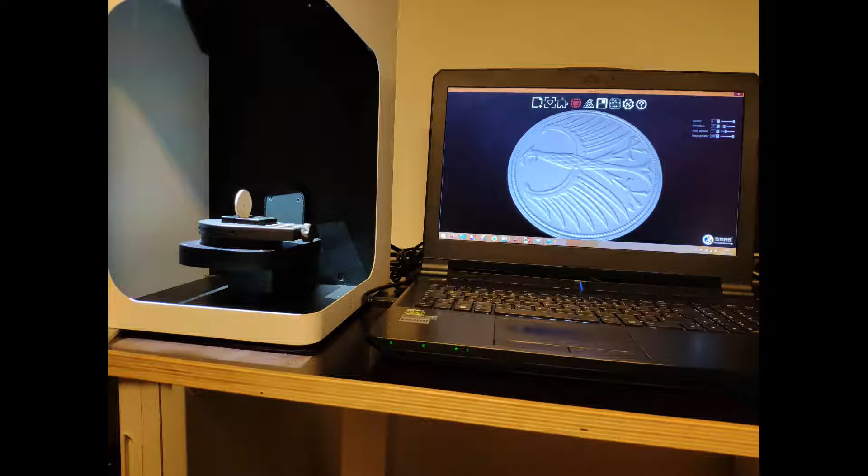This is our recently acquired macro scanner that we added to our portfolio of 3D scanners that we rent. This is a scanner especially for small objects, with dimensions from a bit below 1 centimeter up to, let's say, a maximum of 10 centimeters or even a little less. The advantage of this scanner is that it will capture small surface details much better compared to scanners that were made to scan bigger industrial parts.

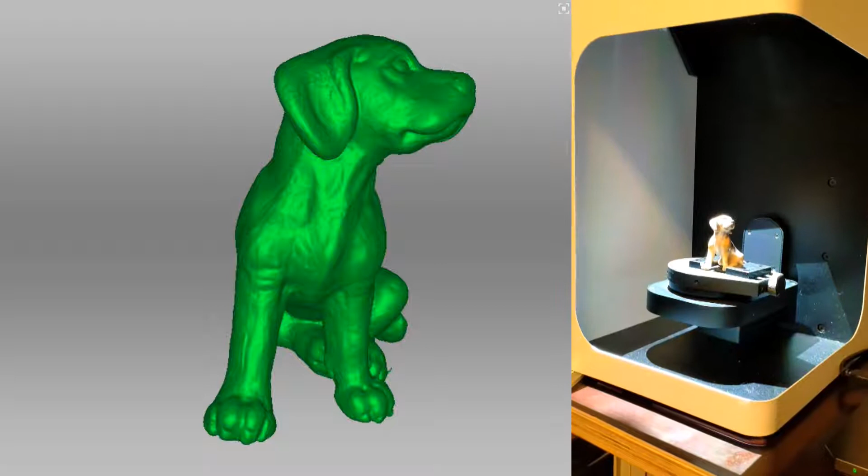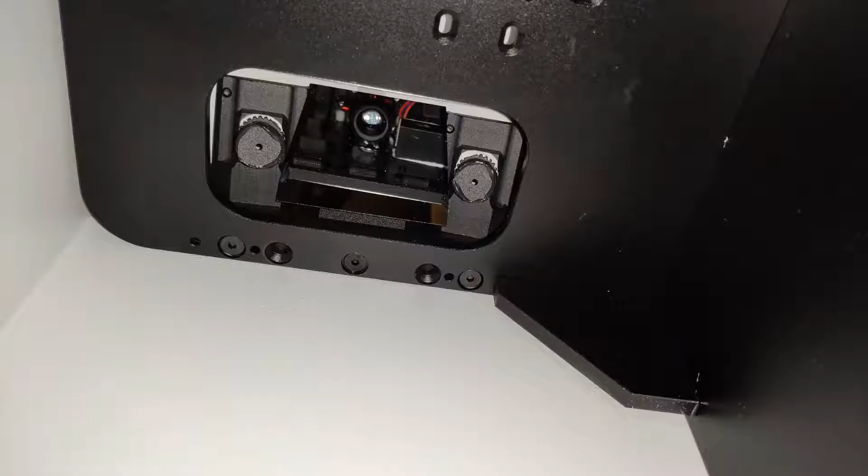So the scanner is especially for jewelry scanning. You can use it for scanning dental objects, but you can also 3D scan miniatures, figures for games and other stuff. By the end of this video you will know how to use it and how to create scans with this scanner. Take a look.

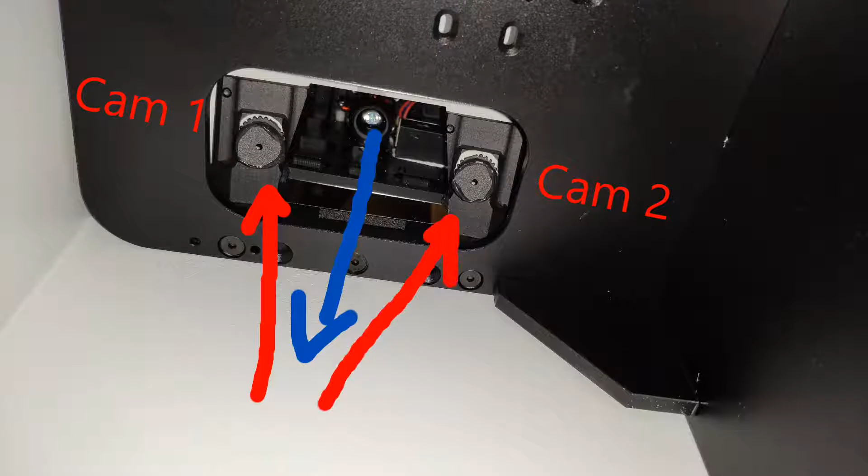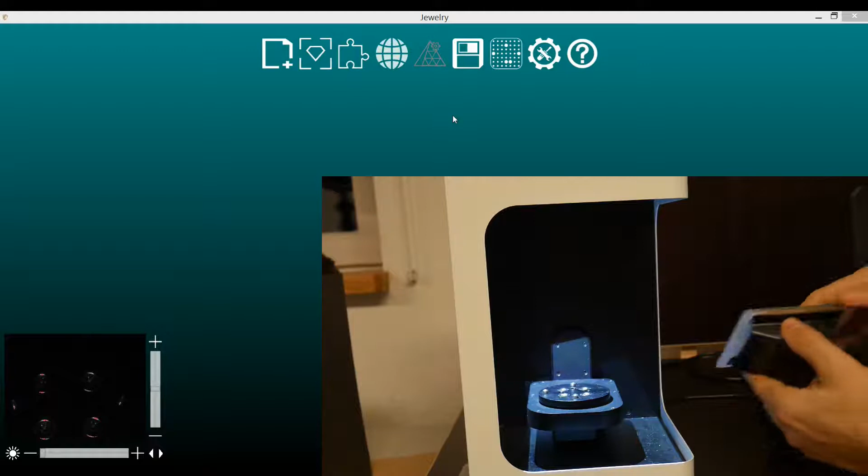So the very first thing you will have to do when you start the scanner is to calibrate it, and therefore there is a calibration board included that has only one possible position to mount it on the turntable, and you don't have to fix it. It's fixed with magnets, so nothing to worry about. For the first calibration, normally you don't have to adjust the brightness. You can, but if you do, you can overbright the image as well. So start somewhere where the brightness seems reasonable to you, and that's fine.

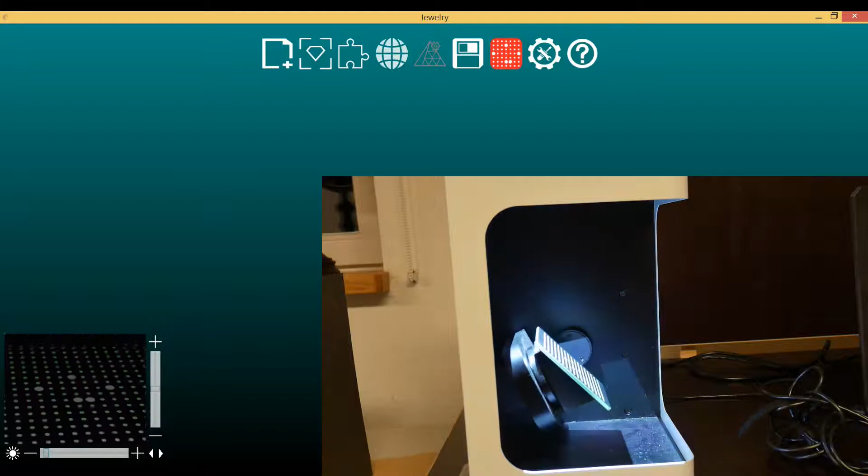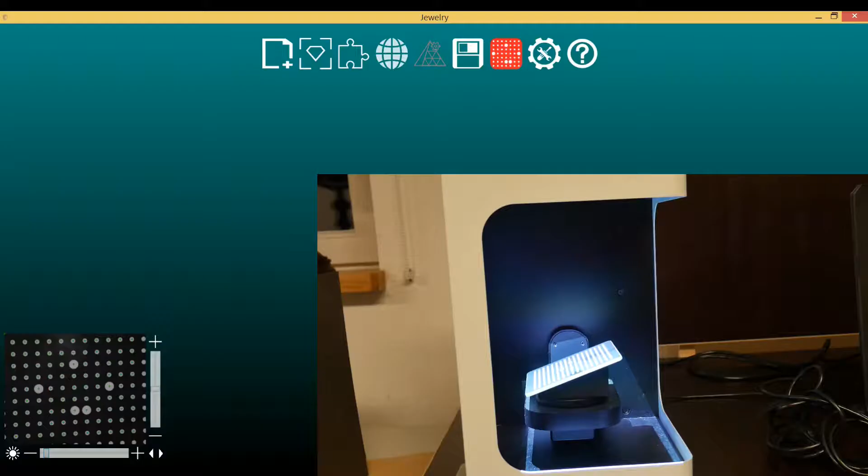And just click the calibration field button here, and everything else will be performed more or less automatically. Here you have to stay with the standard selection. It's 5 millimeter, referring to the calibration board, and this is the only 5 millimeter board available for the scanner. So in several steps the calibration is done automatically. This is not very problematic because you have a 2-axis turntable, so it is not comparable to what you know from other structured light scanners for bigger scale scanning, and that's why it's quite comfortable. So nothing to do for you, just watch and wait.

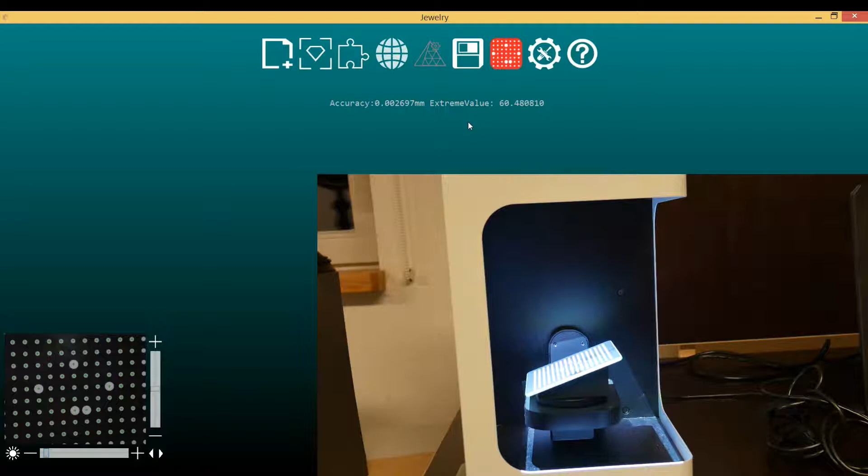Afterwards you get an accuracy value here and an extreme value. It is not exactly explained what it means, but the values are fine, as you have no influence on them, and the calibration is performed automatically. You are absolutely fine right now. Okay, so take off the calibration board and put on the item that you want to scan. That item shouldn't be much bigger than, for example, 5 or 6 centimeters as maximum cubic dimensions.

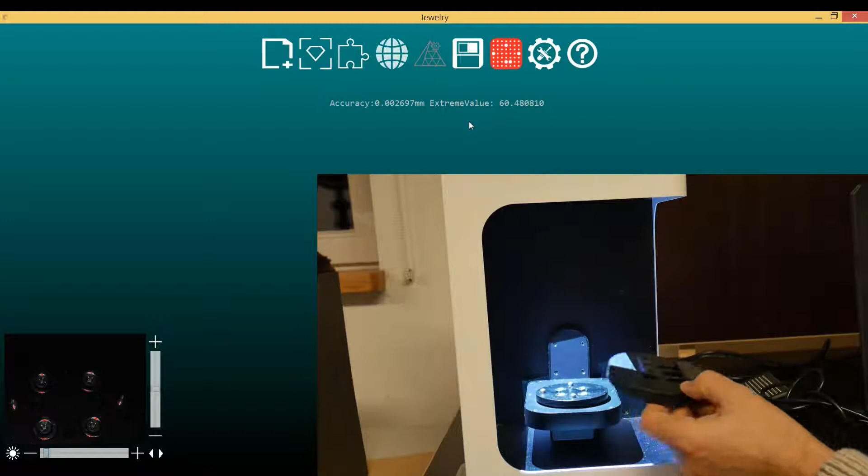So you have 2 possible standard clampings. This is a standard one for clamping over a screw, and there is another one that seems to come more from what you may know from dental scanners. There are different fields for fixing items. You can scan more items here at the same time. I think there will be some 10 centimeters or so maximum scan area for this, but I recommend a maximum object size a bit smaller, like 8 centimeters in maximum dimensions.

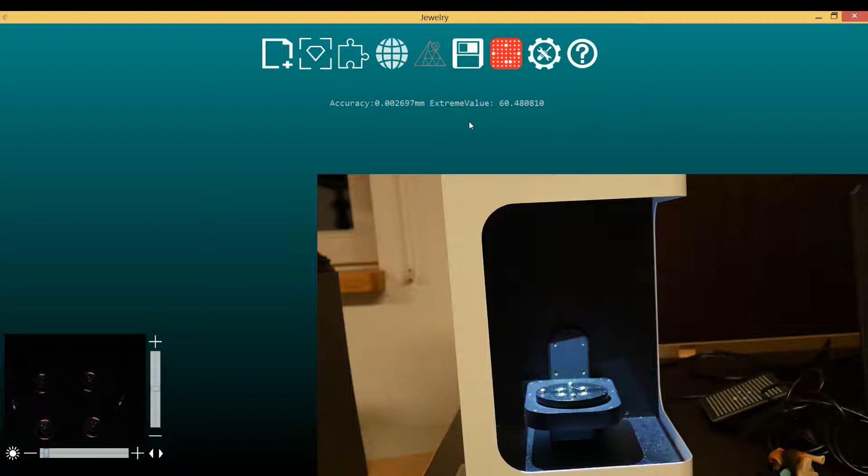All of them have the same plate for the magnet fixing on the back side, so you are not able to do something wrong here, with 3 pins whose positions are well defined. On this kind of table you use some plasticine. You put the plasticine below the object, then stick the object on the plasticine and make sure it's pressed well, so it will withstand the acceleration when scanning on the 2-axis turntable. So for the start and the explanation, I'm doing a quite standard scan. It will be a coin scan.

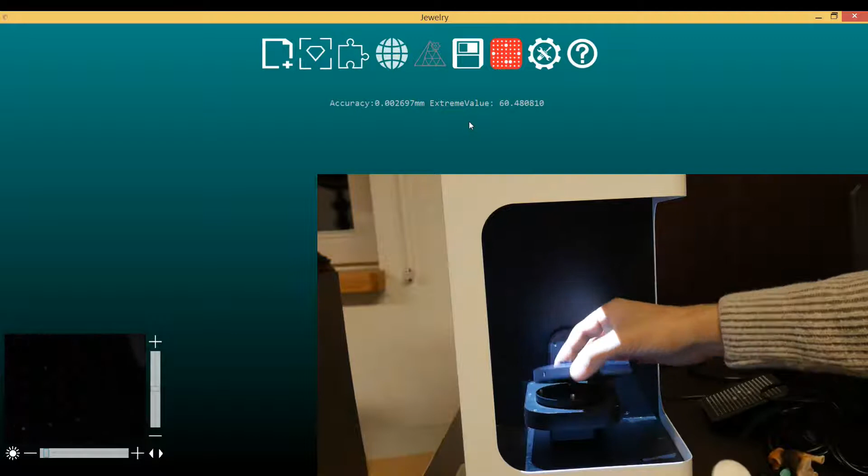For the coin scan, that clamping is quite good. I just clamp it in some depth so that I have a secure fixation, and so that I don't have too much of the object hidden in that clamping.

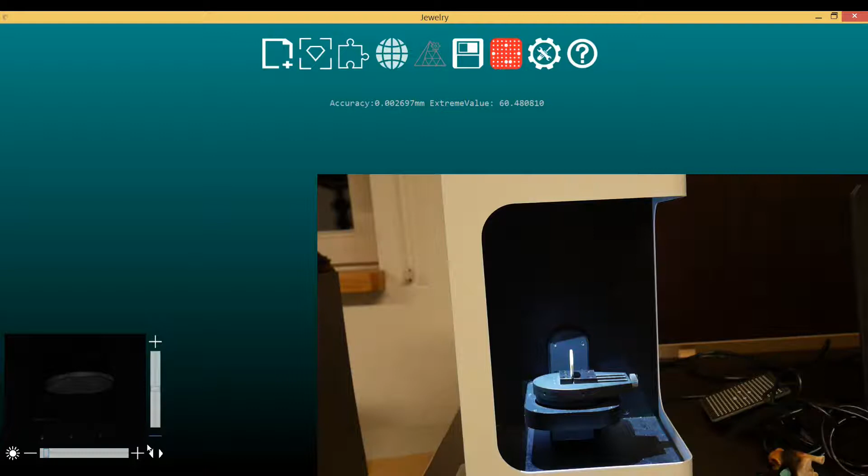I can fine adjust the brightness level. Here it's like in most of the other systems: overbright areas that are, let's say, blurring, are turning red in the preview of the cameras, and you can look at both cameras as well, so they are fine, they are not having any differences.

So I just recommend in that preview to have a not too bright setup. That means you should see at maximum in some very small area something red. Of course, if you are opting for a dark setup, in the case of a black object, you will not see anything. So try to turn up the brightness level till you see the first blurred out red areas, and afterwards go back to the point where all of them disappeared. So you should be fine from the exposure side.

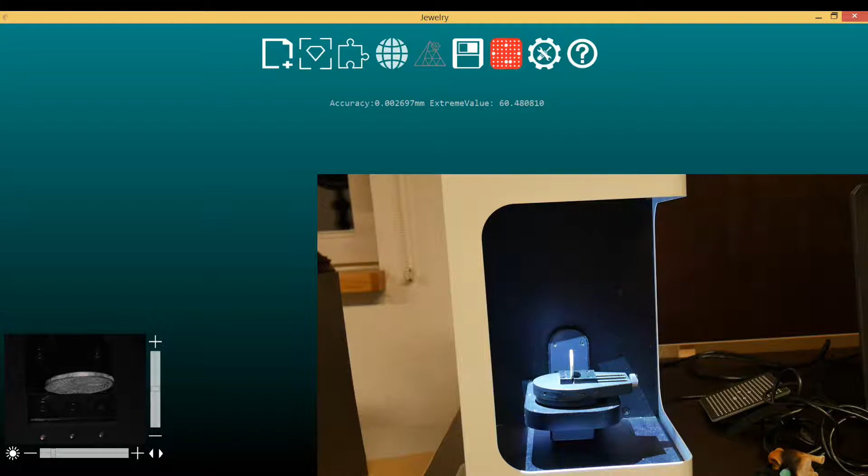And afterwards you can start the scan by first defining the name of the scan. You always have to do it in this direction. The software is not very, let's say, flexible regarding different ways to start scans or vary the procedures. So first define your object name, let's name it coin, and I say HD scan, it means higher resolution. I will start with all the other things in standard. That should be fine for most of the scans actually.

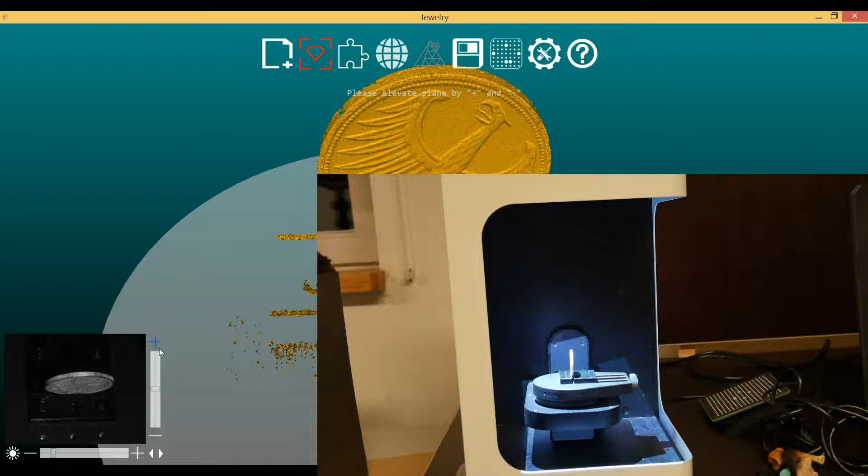And you will receive a pre-scan that shows you the first view. In this pre-scan you can define the area of your scan field that should be regarded. So if you would not change anything and click the OK button, you will scan the clamping as well, which is actually not what you want to see in that case.

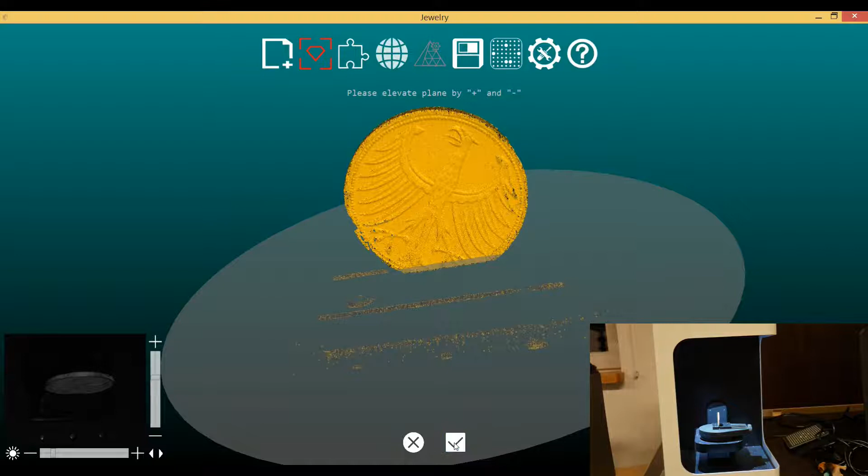So I'm going to go to a point where all the clamping is below that cutting area, but don't cut too much. If you go too far to the upper position, just a very small scanning area will be regarded, a lot of information will be missing, and you may not be able to complete the scan. So just cut away, or keep the clamping below that area, so that you have most of the object above its clamping area. After this is done, you confirm the scan, and the rest will be done totally automatically.

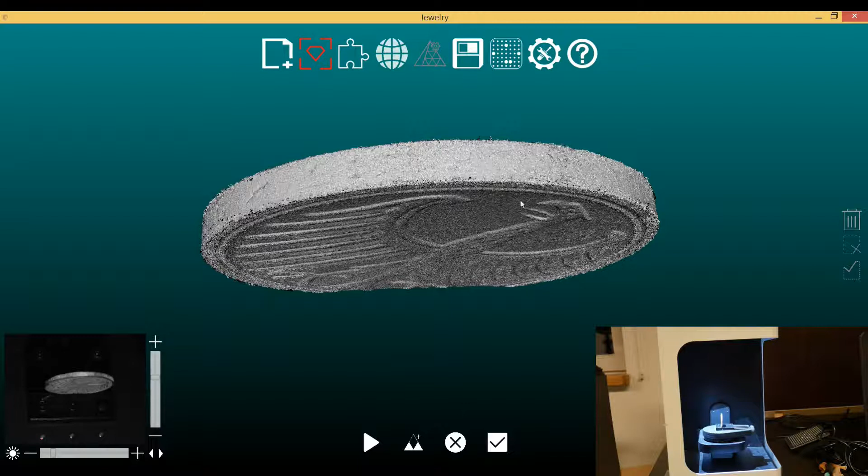So after the first set of scans is done, they are automatically grouped. This means that they are registered against each other, and you see here the first not filtered version of your scan, which is absolutely fine. If you wish, you could cut away some areas by pressing the left mouse button, keeping it down, and sketching some area of your mesh that you don't like, for example. And you can reverse as well, that means go in the opposite direction mathematically: everything that was selected will be unselected and the opposite.

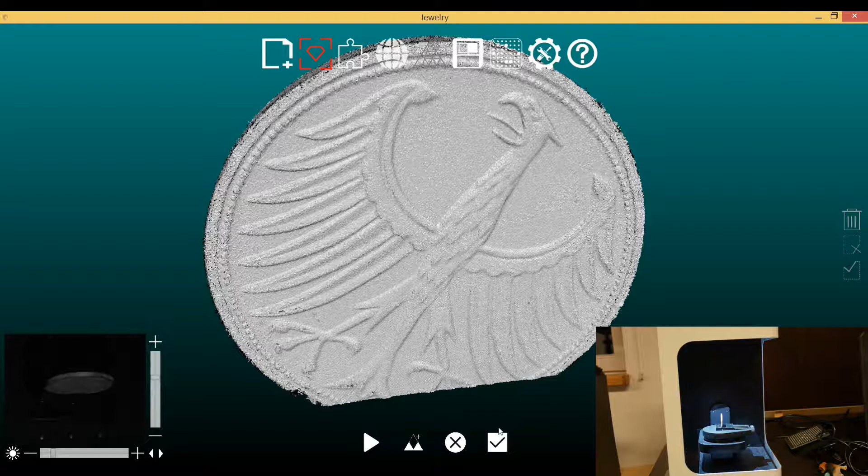Of course, we can go back because I just don't want it. I can delete my selection, and I can delete here that waste without it referring to the whole scan. I can delete that selected area, and in this case it's very small. I just cut away here a piece of an edge. It wasn't necessary, but it's possible, just to show you the possibilities that you have at this point for mesh editing.

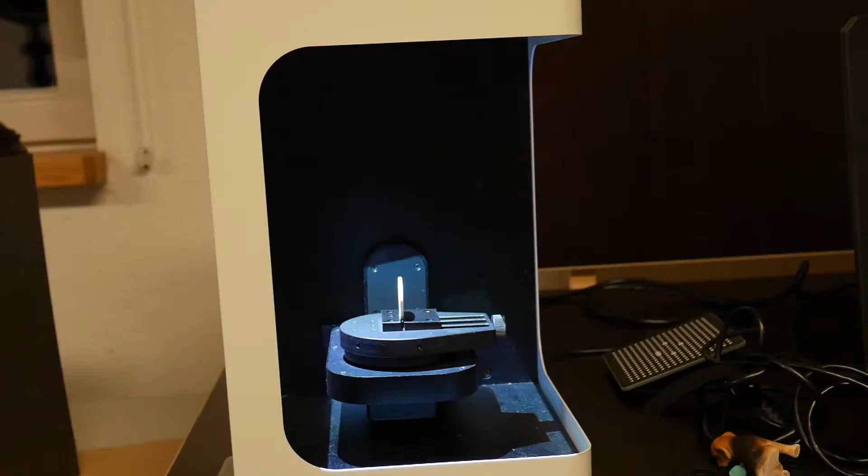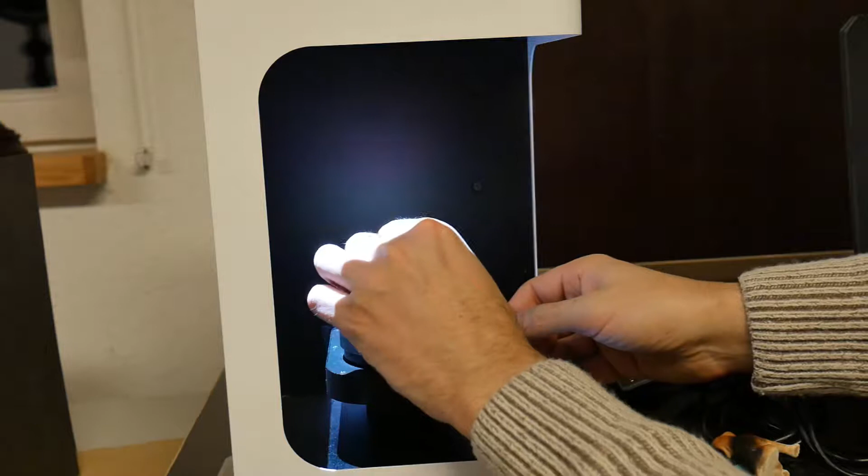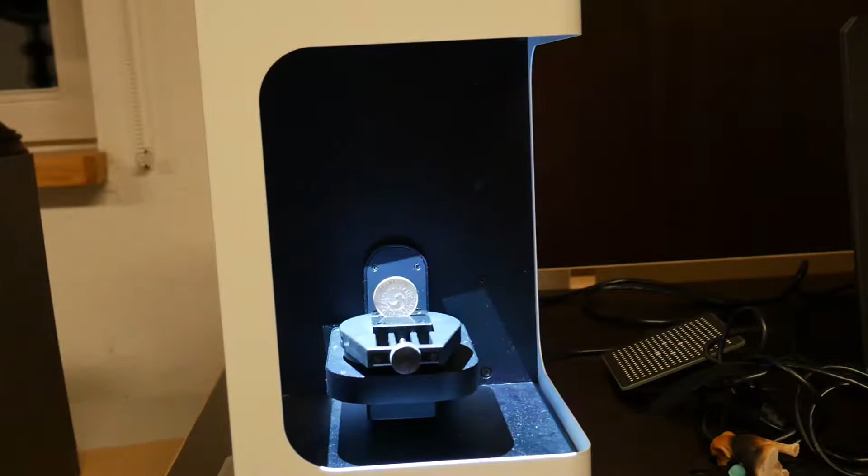I just have to change the clamping position to be able to scan what was hidden in the clamping, and I'm going to turn that coin 90 degrees more or less. If this is done, start the scan again, and another group of scans will be performed automatically. Each group of scans will contain different scan positions and different pictures, and all the pictures will be aligned together to create a more complete surface of your object.

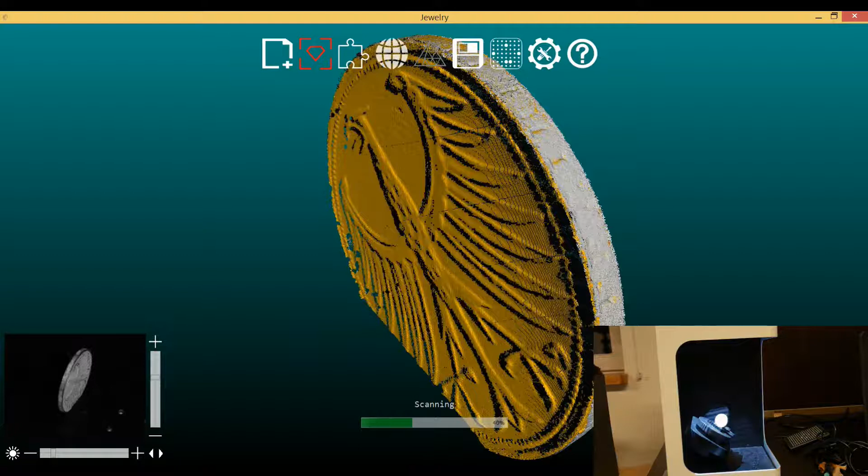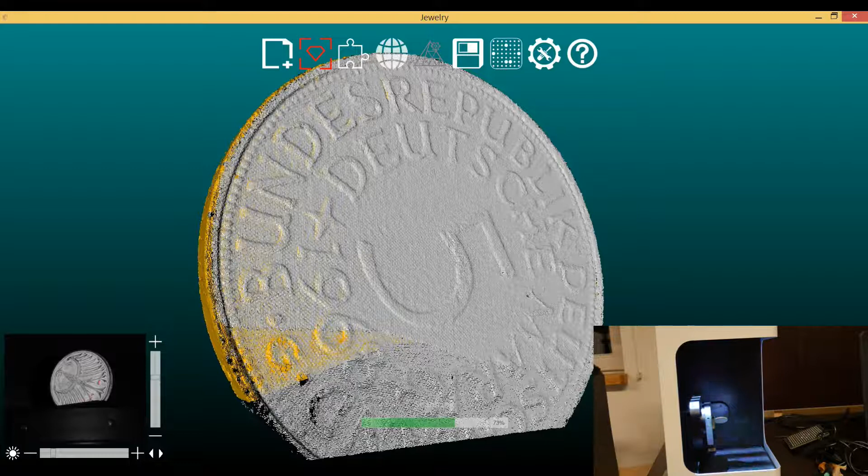Unfortunately, there is no model tree or history tree in this software where you can delete single scans in that automatically performed sequence of scans. So if there is one really bad scan and the rest is fine, you are not able to delete just that one scan. You can only delete one group.

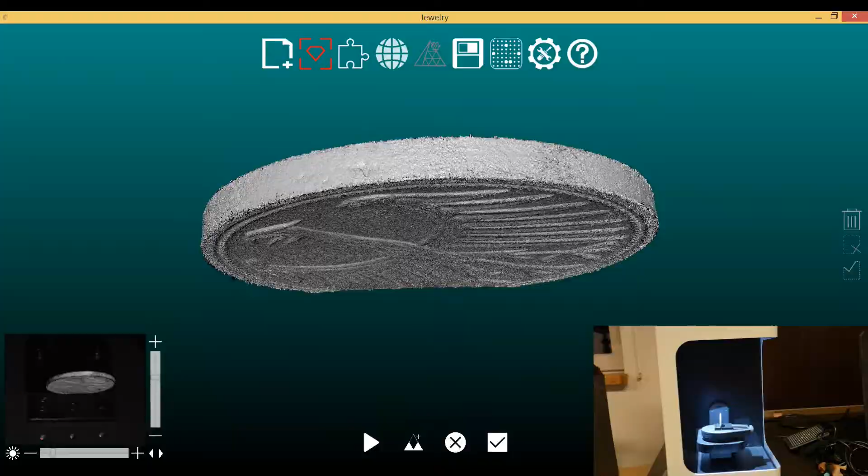That means one new fixture position of your scan, but you cannot delete single scans inside this group. As well, there is unfortunately no visible overview of the number of groups that you already created. So same again, finished one group.

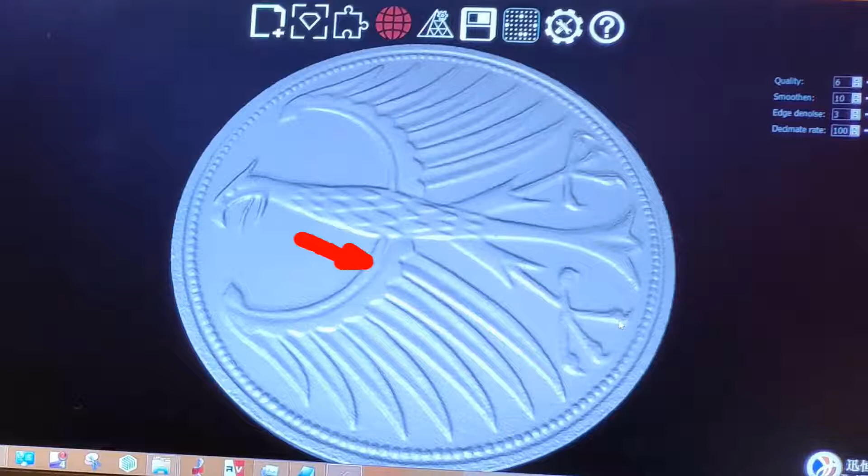Last time the coin will be turned. I just do it a third time, not because the information wouldn't be complete. I just want to have more quality in the different angles for the different small areas.

That means if you have edges in different directions, it is always good if you enter into this edge from one of your clamping positions. Fine, and to be sure, I just made a third clamping position and restart the scan process for the next group of scans.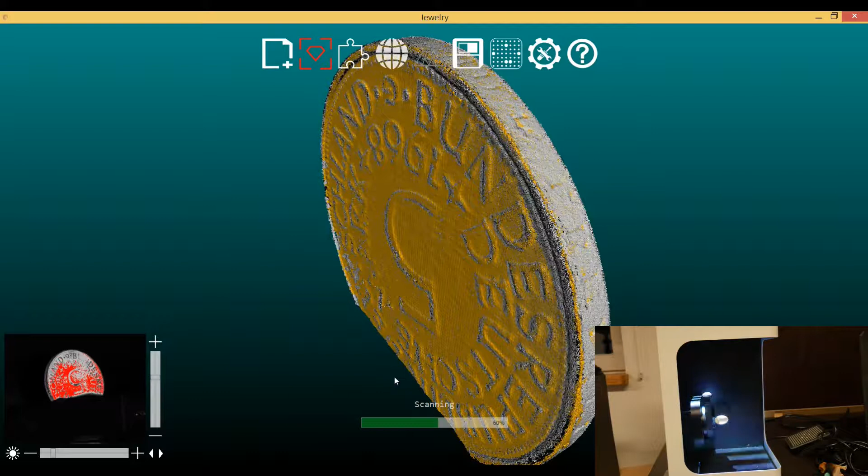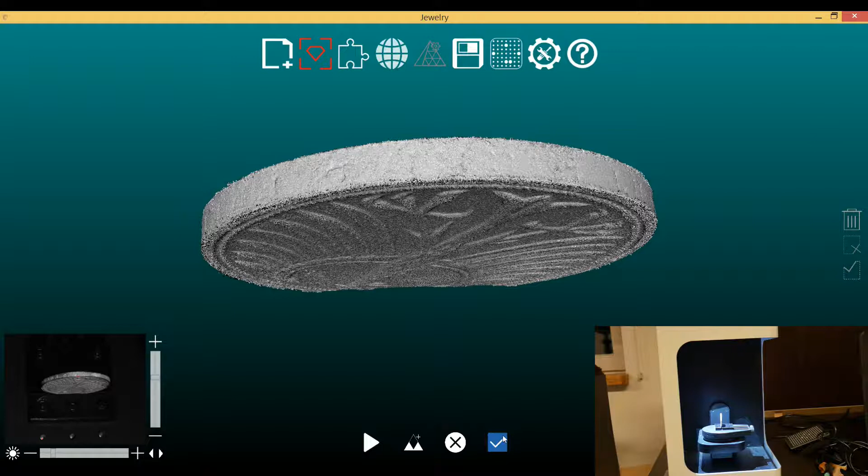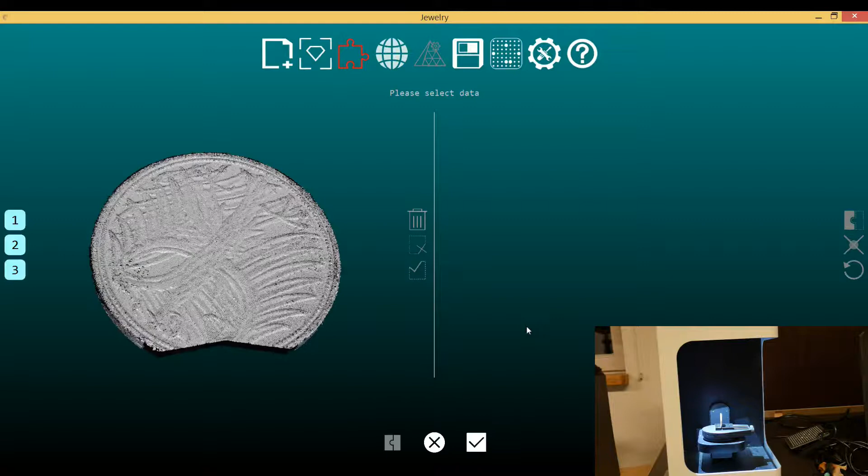So in this case, I'm not going to click on the scan button again because it will create a new group like before. I will finish the scan process by checking the checkbox, and I will be automatically forwarded to the alignment process, in which I can align the different groups that I created to be together one complete model.

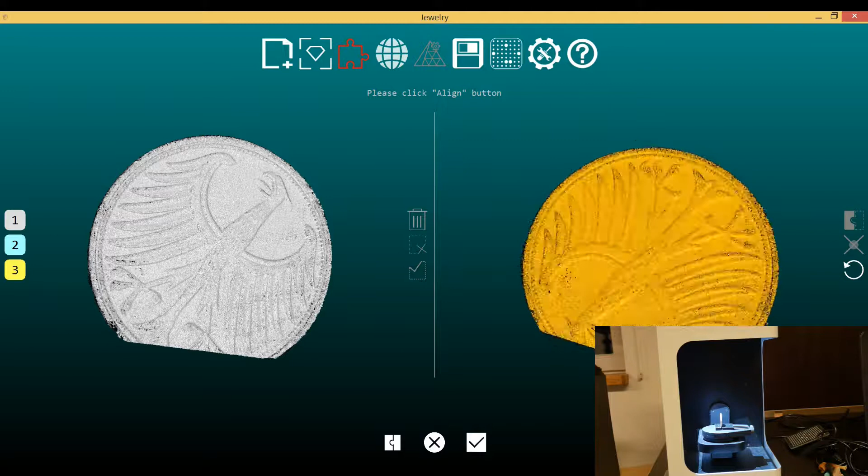And I see here all of them. I just want to select one of them, and I can select a second of them, and the two that I selected will be automatically shown on the two sides of the screen for aligning both groups together to create a closed volume.

Just to help myself, I orientate the coins in a direction where they are in similar positions, so I can orientate myself easily. With this coin it's absolutely not necessary, because you have a lot of clear features, but with other objects it might be very useful to do so. So in this case I'm just going to select 3 points that refer to each other.

Okay, I already started to select one point that is not scanned in the other group, so I don't have a possibility to align these two positions because it's just available in one. So in this case I can go here on the right side, undo point select, and the selected point will disappear. If I have selected more of them and they are wrong, I can go here and refresh and all of them will be gone.

So let's start again. I just search for 3 points that are visible in both views and that I can use for aligning. I always start on the right side. You can start on the left, it doesn't matter, and click the equivalent point on the left side. And I choose points that are easy to identify, on some edge or some area with a feature that is easy to find. And I'm using points that are far away from each other.

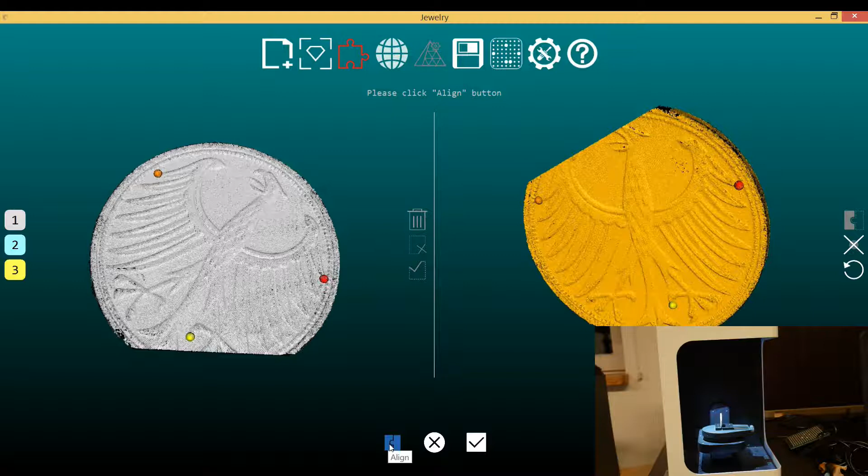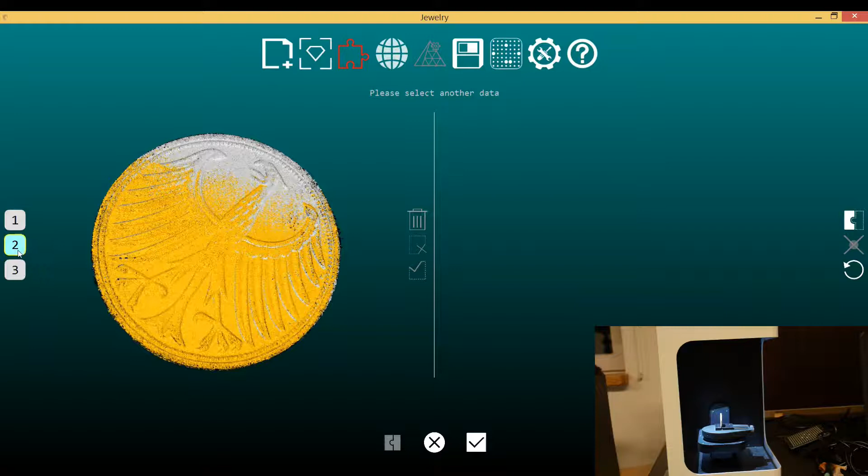After selecting 3 corresponding points, I can go here to the align button to orientate them against each other. At this moment you still have the 2 scans that you are aligning marked by color. Now the scheme is changing, and the only colored group is the one that isn't aligned to the other 2. So the one to be selected is this colorful one, and on the left side you already see the 2 scan groups aligned that you did before.

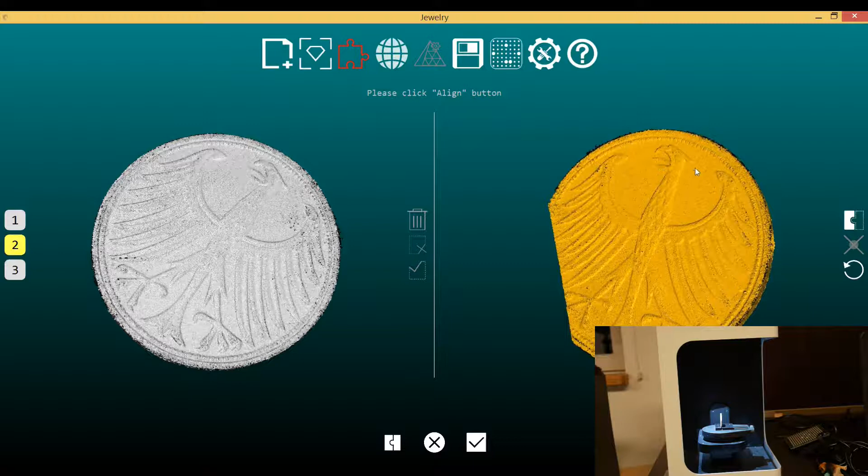And I repeat the same process using 3 points. You just have to select them with the left mouse button, no special shortcuts, and do it on both sides.

In the software it can happen that in the second alignment you select points and they will have different colors. Normally the corresponding points always have the same color. It should be like that. If it's not like that and you surely kept them in the same area and did it like I showed you, one side and then the other side, and don't mix it up, you will be fine. It will be no problem.

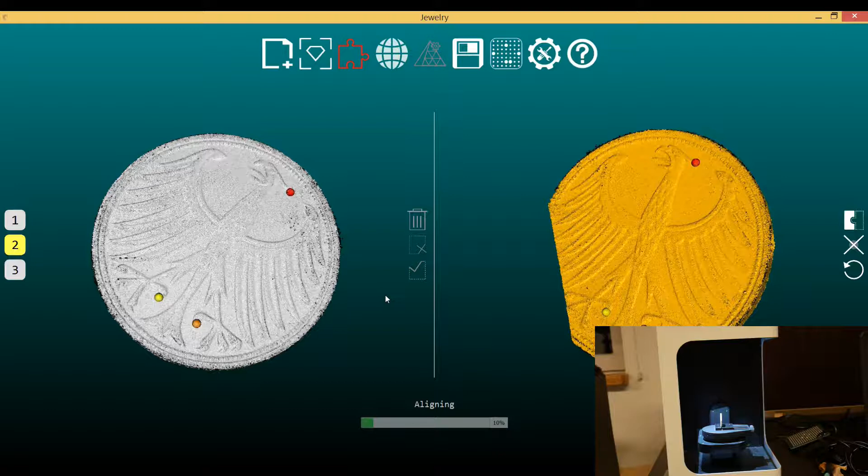It will align as well. So let's align this group, and as we have just 3 groups, we are done. Afterwards, if there would be more groups, there would be more group buttons below them, and it would be marked in color which of them are not aligned to the groups that are aligned to each other already.

So it's easy. After you are finished, you can complete here over that button, and you will be forwarded to the merging. And if you are not satisfied with your alignment, it is possible to go back over unaligned scans, or you can as well refresh your view if you didn't define the points, and you will be going back the step before. But in this case, everything's fine.

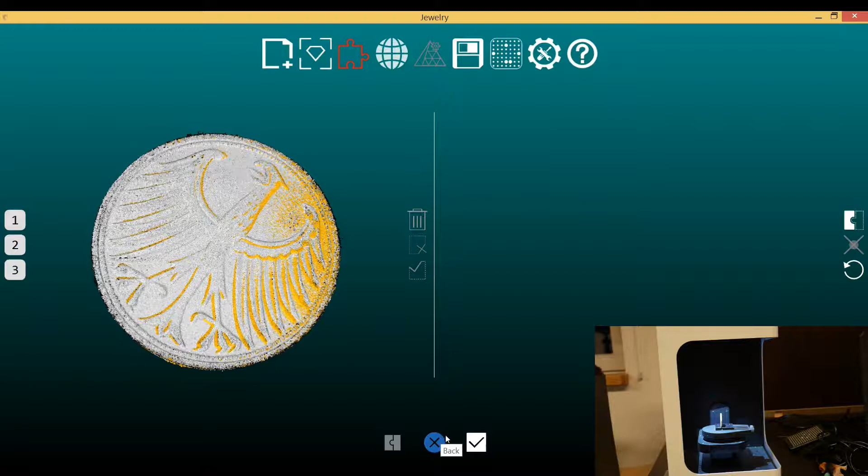I have the buttons that have no functions, they have them gray. I can click on them with the left mouse button, nothing will happen. So everything's easy. I can here as well jump back to the process before if I don't want to continue align, but I'm fine with alignment, and we are done.

And we are right now in our preview before the merging and the global registration process. So I see here that I have a small error in the alignment in the wings, for example, and in this case I can go back. I will have to, of course, do

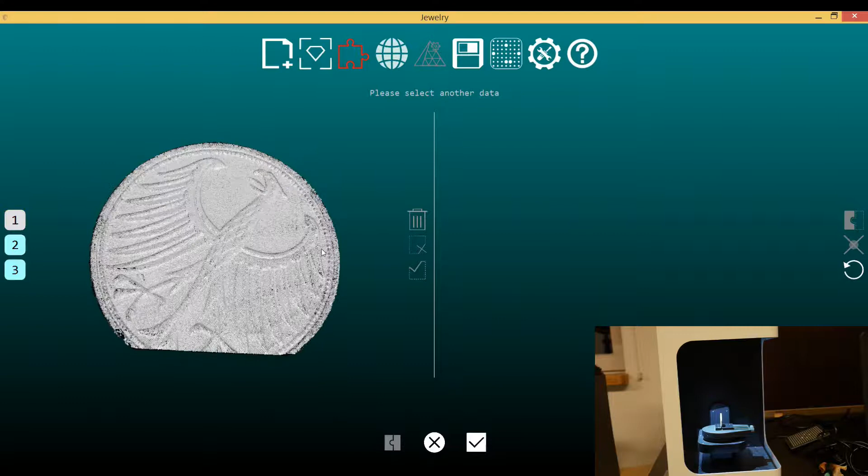that process again, but just to show you that it's possible, because I think the software is very easy to overview, because there are not so many buttons, but the navigation inside the software is, if you have never used it, a bit unintuitive. So we went back, so we are selecting 3 points.

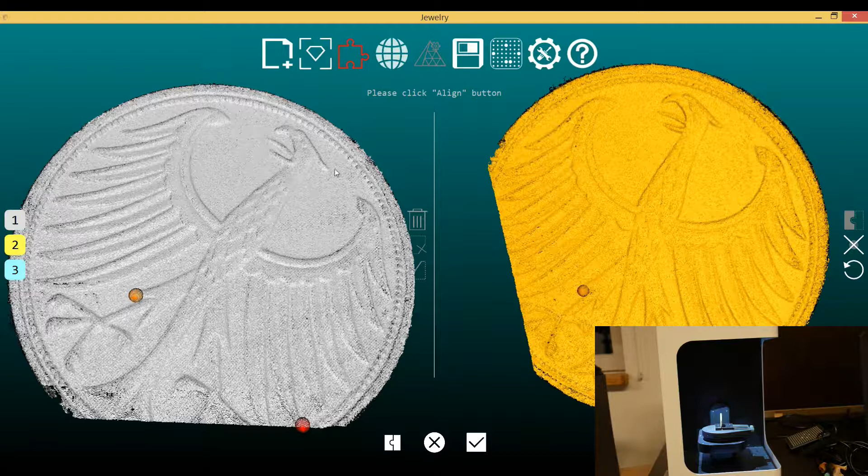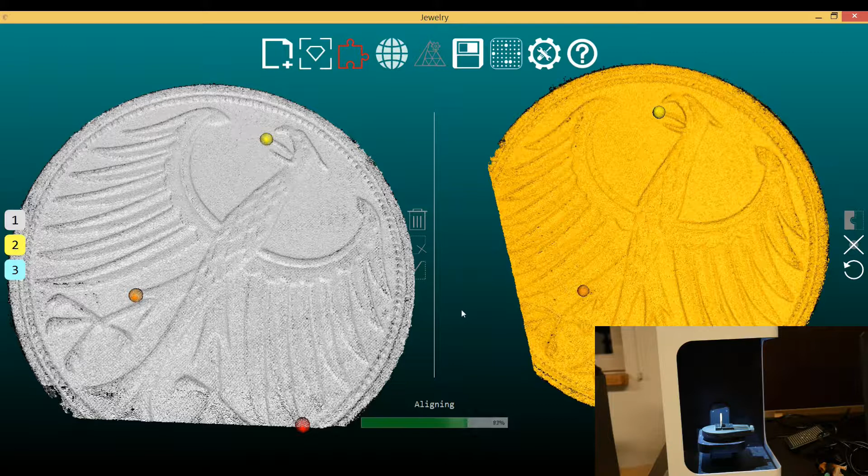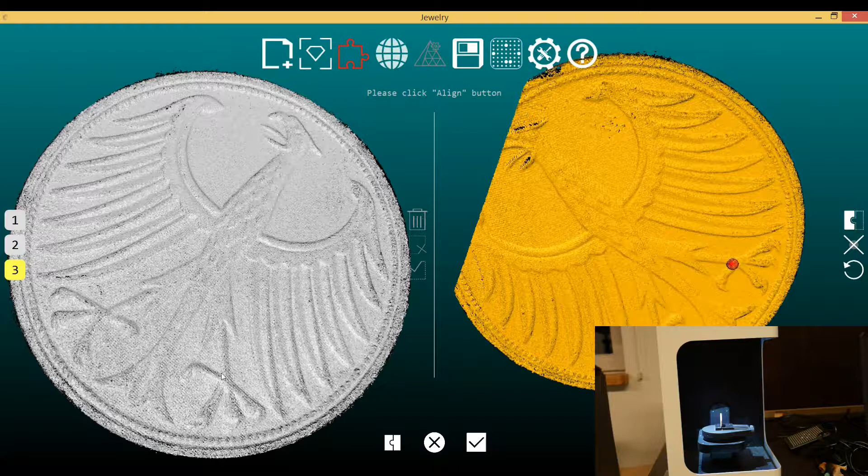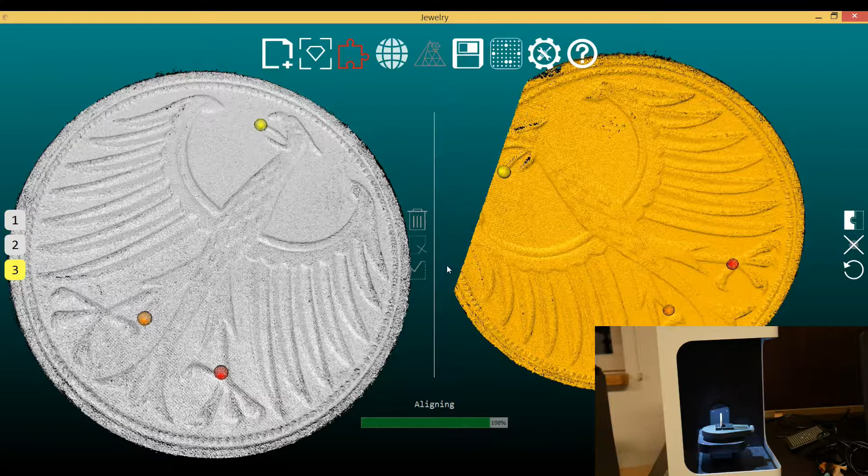That are in the same area. So this time these 2 wings should be fine. I'm just going to select my 3rd scan. Nothing new. Just click on align. Finish the process, and right now the wings are aligning better, so everything's fine.

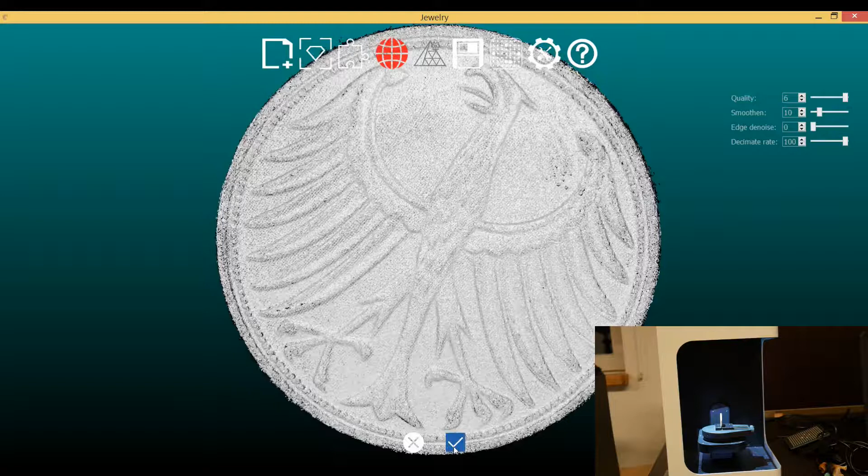Just keep in mind, if you complete here, you will have no possibility to go back into the alignment process. What I think is a bit of a pity, because you might want to go back and check how the result looks with additional scanning groups, and just start with the minimum of effort in scans, and then on demand continue to make new groups. So this is, at this point, a process that is not revertible.

Okay. We are in this moment waiting for the merging and global registration process. This was started already by an automatic process when I was clicking on finish, and there are toolbars where I can adjust filters and different variations of the settings.

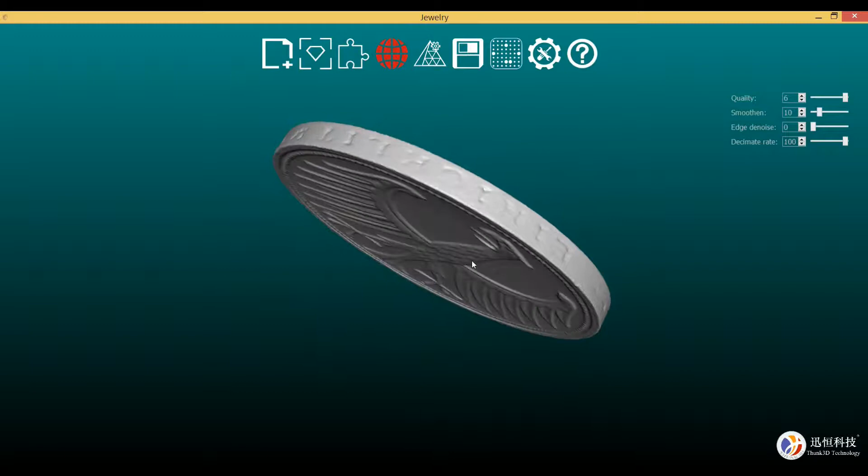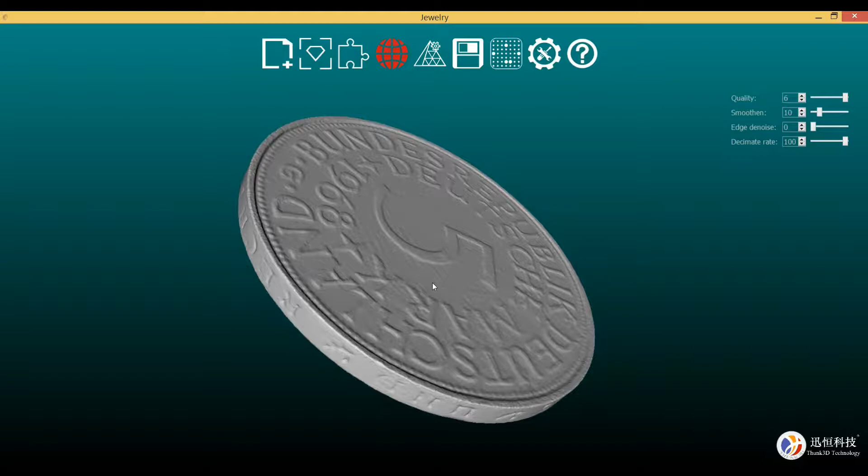And here we are with the result. This is the result that we received by the current parameter setup. I think this is quite a decent result if you take into consideration as well that the writing on the coin isn't perfect on the original one. You see that there is still, from the spraying, some kind of surface noise, and you can use here smoothing or denoising, edge denoising if it's necessary.

It doesn't look like edge noise. If edge noise is the case, you will have some kind of artifacts on the edges. Here you can see small dots that seem from the matrix. Actually, not from the camera. I think it's more from the projector side. But to get rid of it, you can just try to smoothen the surface a little bit.

I won't use edge denoising. I'm not sure if this will bring a benefit here, if it's really worth the pain. Maybe not. I think it will maybe as well create less sharp edges. You can of course as well decimate the mesh size. It means you can make it smaller.

I normally use different software for this process that I like better regarding the algorithms, but of course you can do it here, it's no problem. You can reduce the quality if your mesh is too dense in your opinion, but it will be fine so far. So we continue, and after wrapping is done, as I call it here, or merging, you are as well capable to save the files.

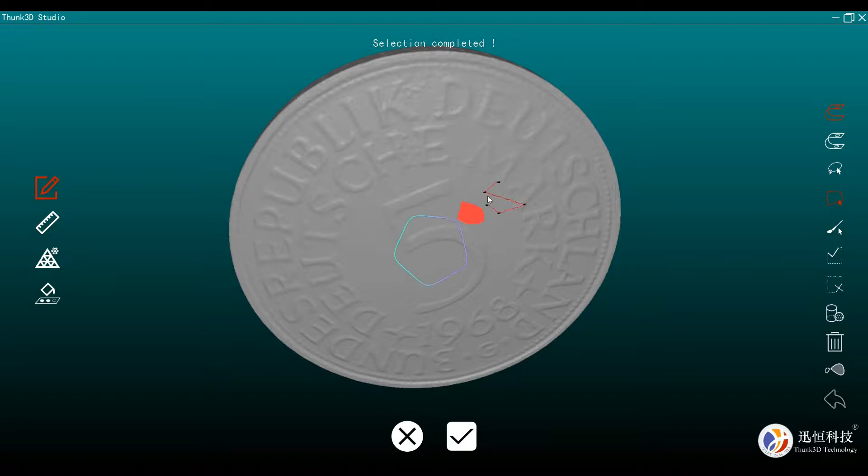There's a possibility with the polyline selection - just clicking on the areas you want to select, and a polyline will be created on the mesh side. That's one possible way to select.

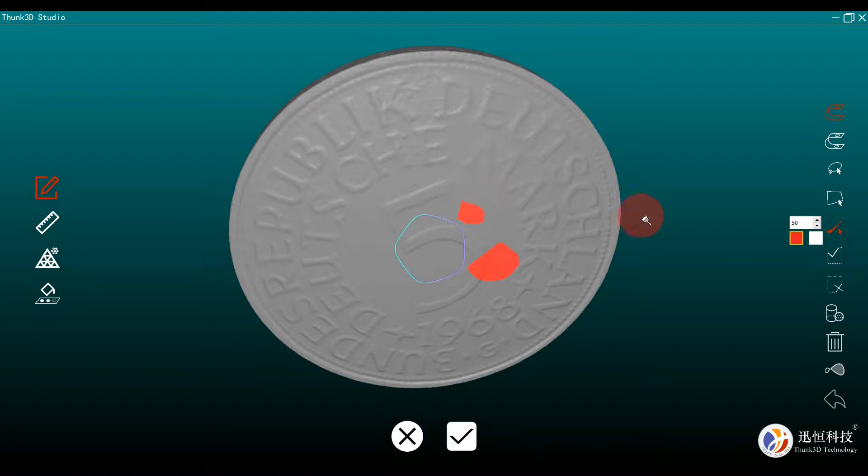Circle selection - for some reason it wasn't working before. That's paint selection. I can here with the parameter, as well as with the up and down buttons on your keyboard, change the size of the brush. Nothing really special, you can also unbrush areas you already used.

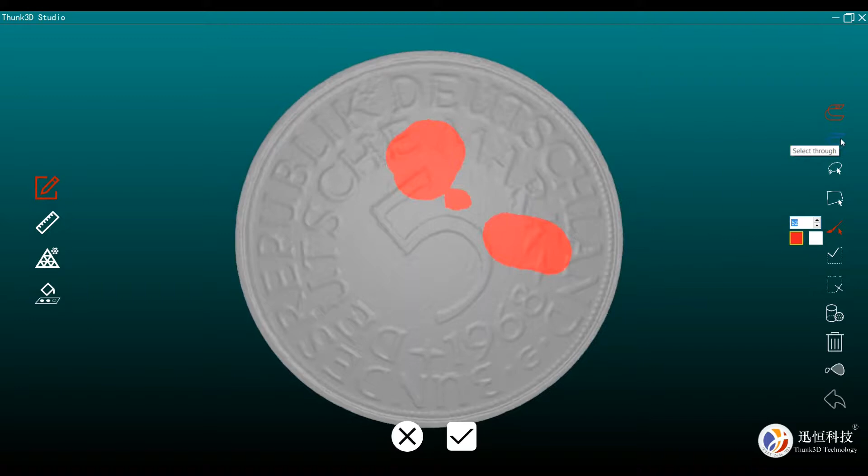You can select components if there are many mesh components - select through, and select visible. If you say select visible, only the side of the mesh you're looking at gets selected - of course you have to select, not unselect, and you see the back side isn't selected. If you select through, in the case where it's working properly, you select through the mesh, through all instances of the mesh.

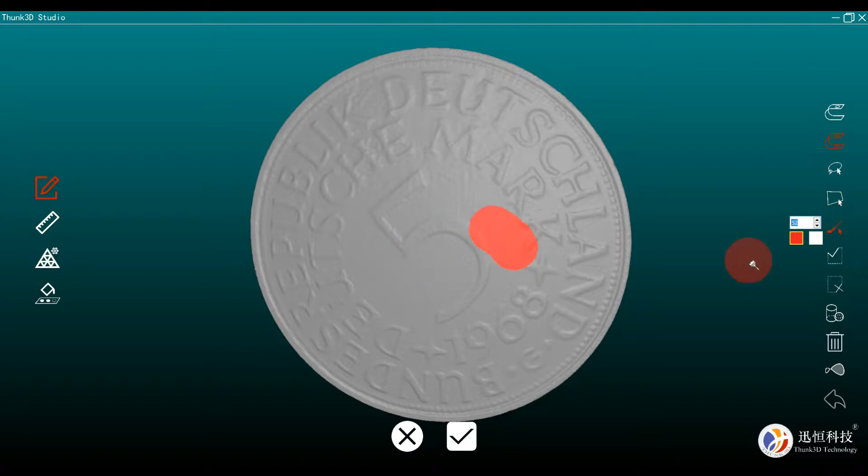I can also unselect everything at once, and select something again, and reverse the selection - that means everything that wasn't selected is now selected, and vice versa.

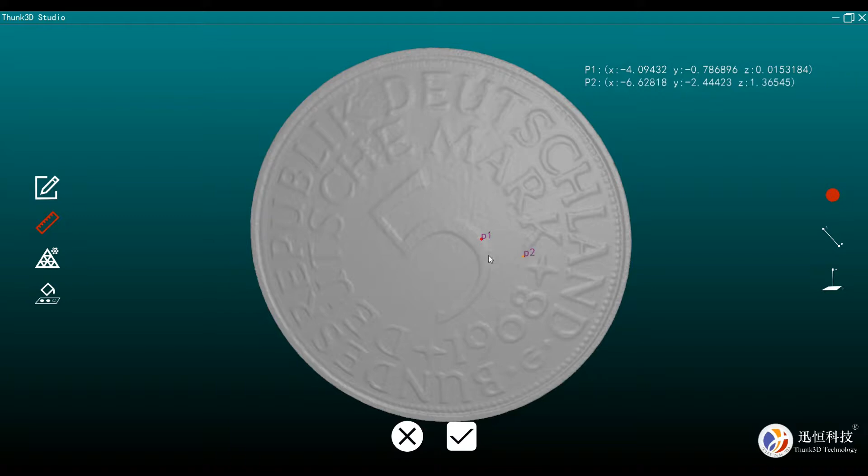You can measure from one point to another on your mesh, and with the right mouse button you can undo the last selection - it will unselect, and you'll receive coordinates above here. I didn't use it too much. I also have a fill holes command, which lets me fill areas that weren't closed.

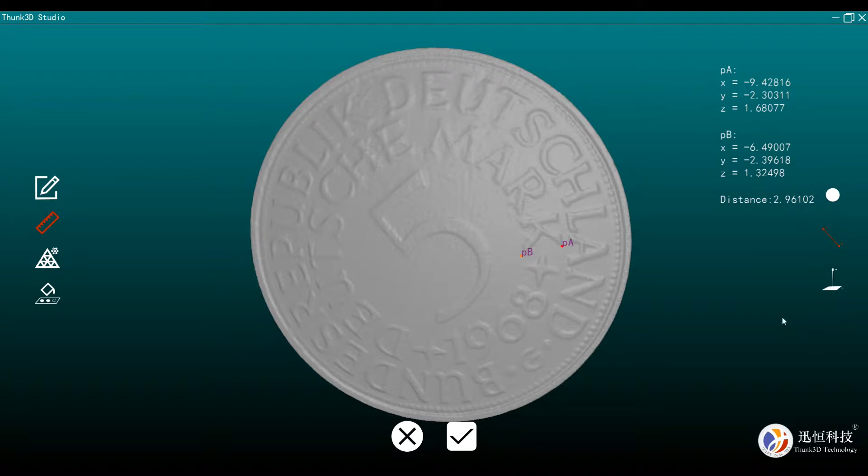This is the measurement between two points - if you select it here, you get a distance dimension, and you're also able to make a perpendicular distance to some area, but that's not so important in this case for me.

Nothing really special, everything is quite easy to understand and use. I think that's fine so far - just to explain the other fixation I showed you before.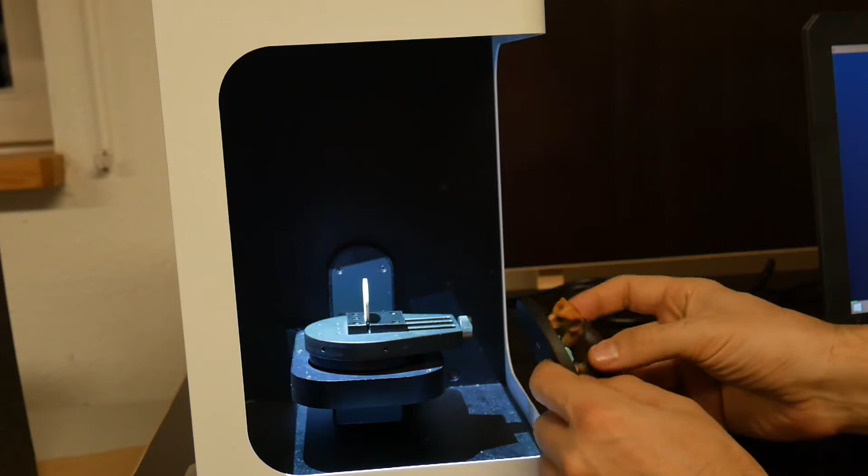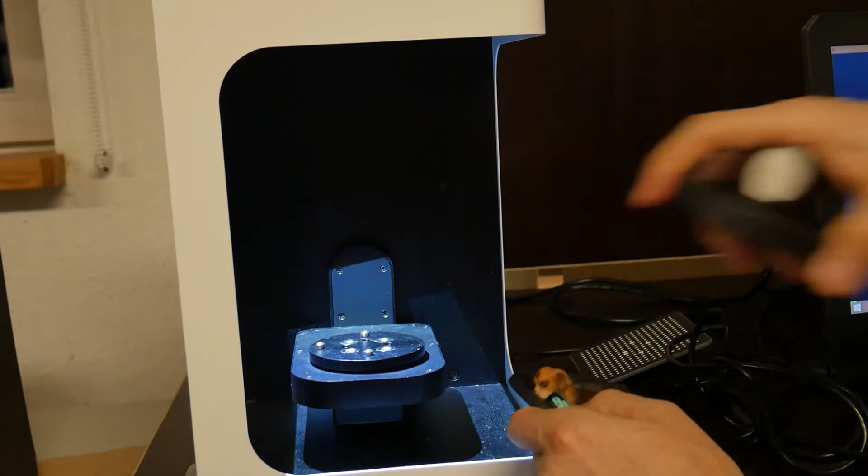In this case you're using a plastiline, a bit similar to chewing gum - but please don't use chewing gum, it will be hard to remove. You stick your object inside, it should not be too dusty, because if it's dusty it won't stick.

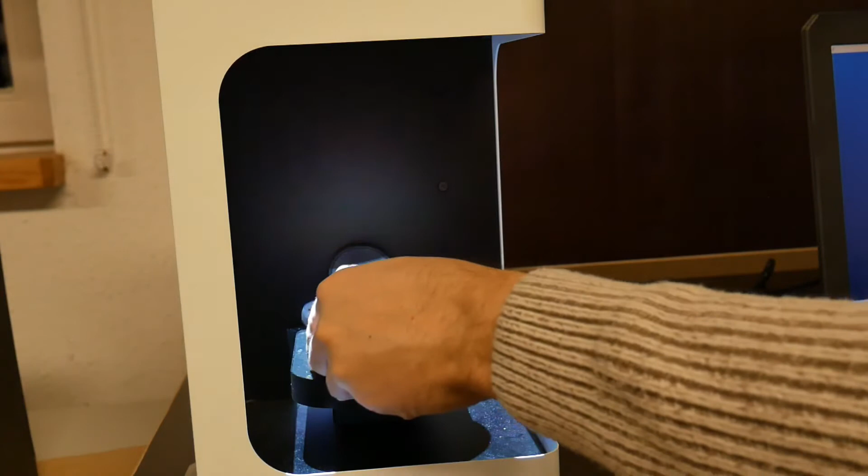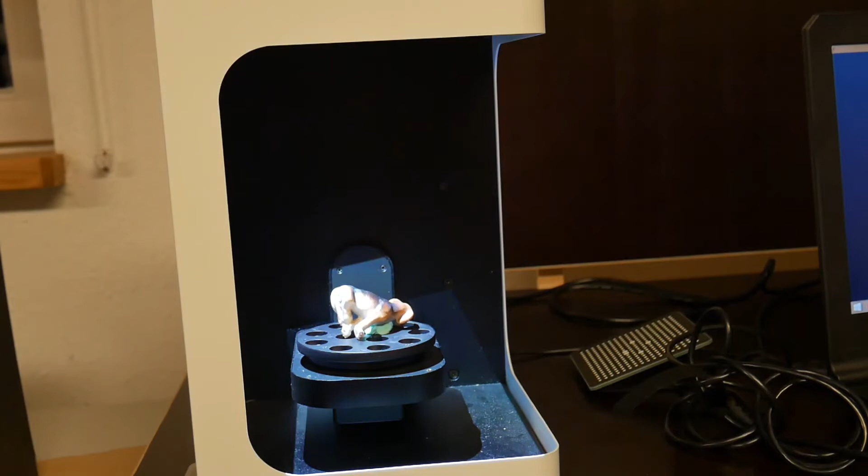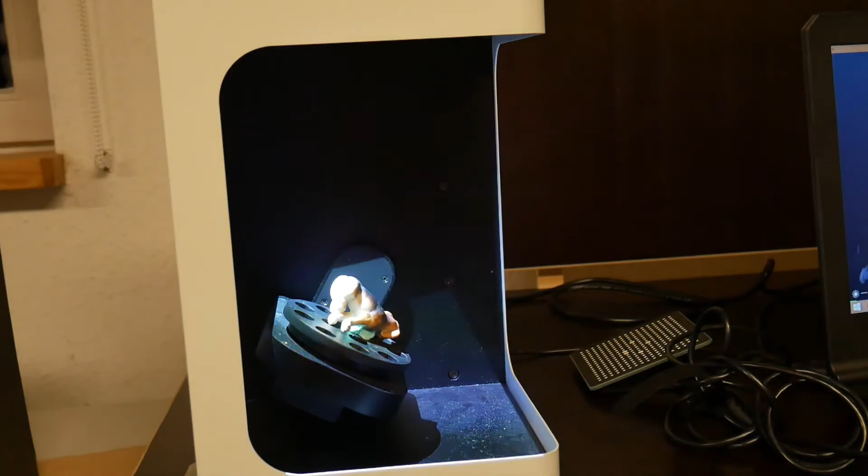You can just put it in place like it is with that other fixation done. Just make sure the three holes are oriented like they should, and you could start a new scan. Let's name it 'doggy' - it would work fine for this kind of object because it's not too heavy.

Here you can see what happens if you're not setting up the brightness well - there's a lot of missing information in the part where the dog is black. So I can go up in the brightness level of the cameras, and still adjust that cutting plane like before, and afterwards everything is like in that scanning process with the different fixture for the coin.

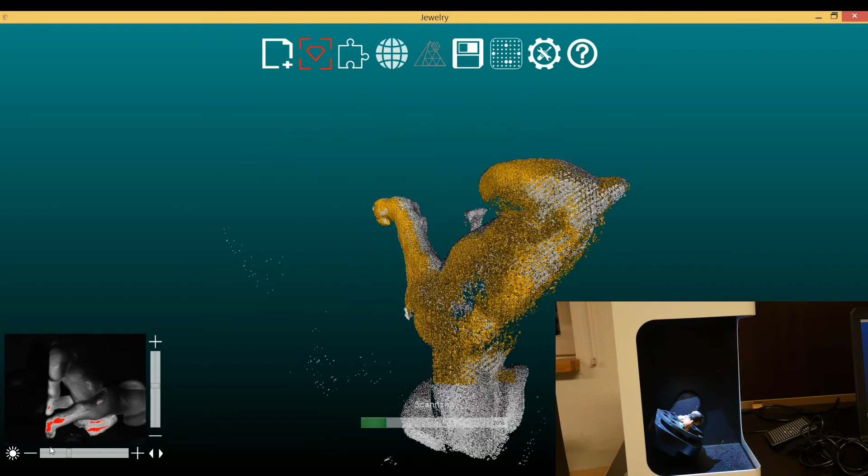I can also, meanwhile I'm scanning, tune and change the brightness level setting to get the scan process adjusted meanwhile. Basically that's it - all the other processes are like shown with the coin, and you can use the jewelry scanner right now with all the knowledge you'll need for standard objects.